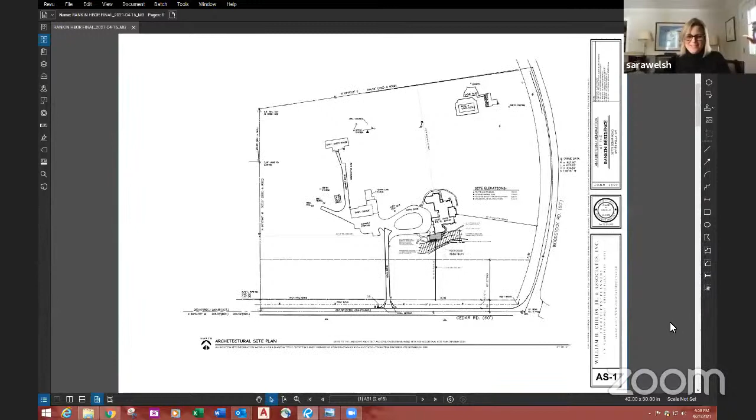There's Dave. Nice background. And we are live streaming. Okay.

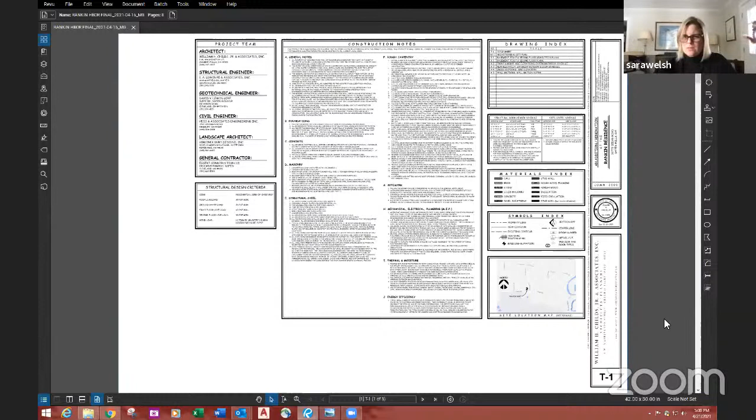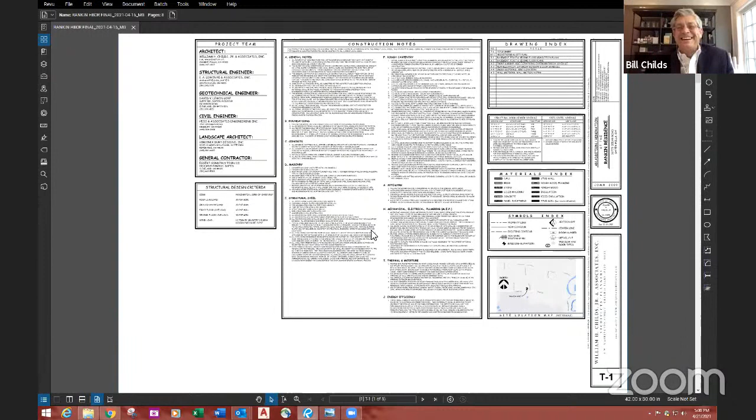Well Bill, I hope everybody can read every one of those words on that page. Yeah, might need to get double glasses here. Yeah, exactly. Oh there, there's that. That's better than looking at a bunch of writing. Yeah, there you go, exactly.

Is there a presentation mode? I'm just curious. Maybe that is it, but um...

It's a good place to start.

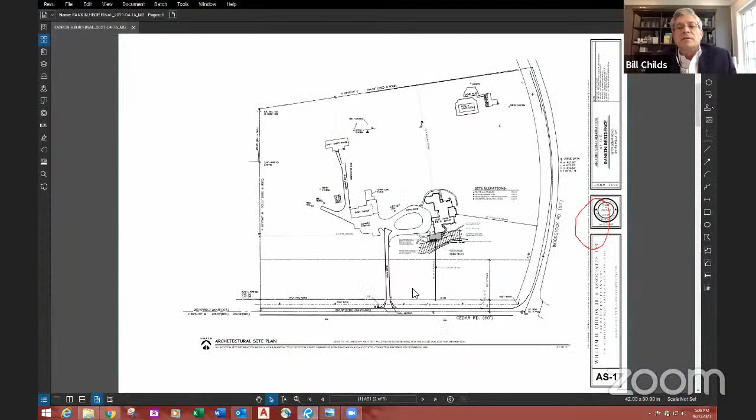Matt, do you want to go maybe to the site plan? Let me clear this. So this is the site, and let's see here.

There we go, thanks. So this elevation, or that photo that I just showed you, was the picture looking this way if you're not familiar with the property. And this is where we're proposing our addition, this shaded area.

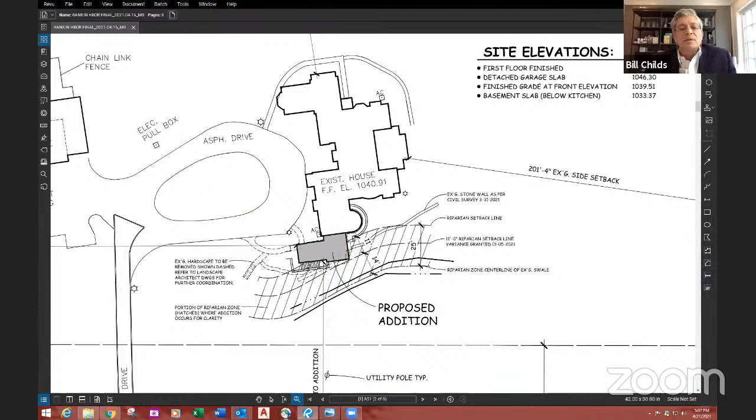So the kitchen is right here, so it comes off to like a little linen area / mudroom over in this direction, and there's a little porch here. And then we're working with the landscape architect to develop a secondary circulation path to the driveway. Do you want to go to the next one there, Matt? Maybe the floor plan.

So this is our floor plan. The previous page you just saw is the demolition plan. I won't go through every little detail, but basically, this is what was existing here, which was a small porch and a staircase that goes down into a basement area.

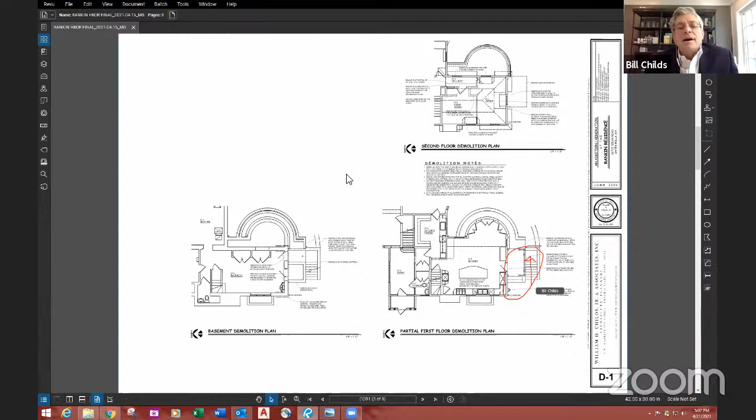And up in this area here, we're doing a little bit of renovation work for Beth's office, but our addition is more or less going to extend out this way, which you'll see on the next page.

So this is basically the foundation plan down here, which again, we're going to have a staircase that goes along the side like it currently was and goes into a basement area that is going to be unfinished.

The first floor right here is the kitchen, and this is going to now go into this transition space, which will have some linen cabinets, a half bathroom right here, some closet space. There'll still be an access out the back with a door here.

And then we'll transition into this volume, which would be pretty much a mudroom. It'll have a sink, some base cabinets, upper, some seats with storage, and then come out to a porch that detailing wise and the essence of it was very much like the original one, which is on the side of the house. And then again, we're going to have a circulation path that gets us back up to the driveway.

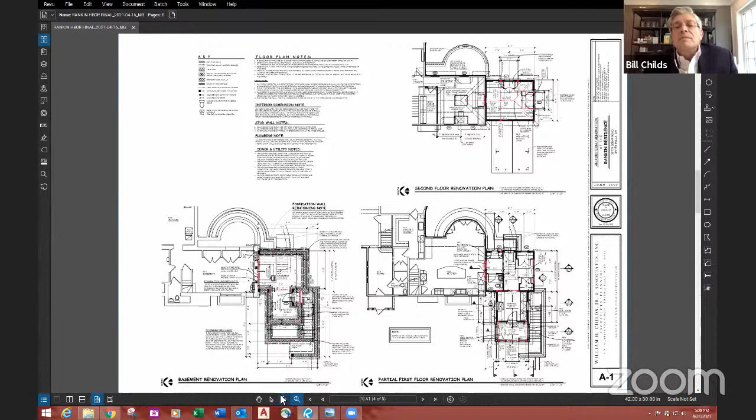Do you want to go to the next one there, Matt? Would you zoom in? Oh, sorry, not to interrupt you. Say it again, Matt. I can zoom in if you want. Okay, yeah, maybe a little bit just to get a little clearer picture of it. That's good, yep.

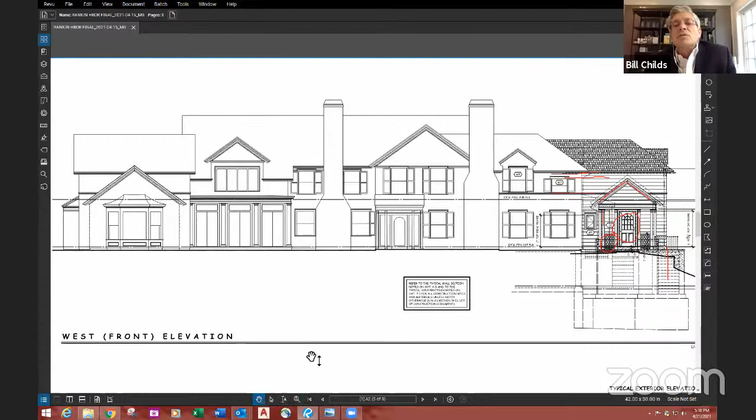Over here is the side where the stair goes to the basement. And then this door is to emulate some of the doors that are on the existing house, so they all match and are concurrent. Do you want to go down to the lower elevation there, Matt?

So this elevation is the one facing Cedar, which is south. And as you can tell, the grades down here, this kind of falls off into a slight hillside. And this is the pathway to the mudroom, which you can see the columns again in the pediment.

Again, this is the mudroom area. This will be Clay's office up here. And then this is the area where you walk in where there's some closets and some linen. And we still have a circulation path that leads us back out to the rear yard. Do you want to put up that last one then, Matt?

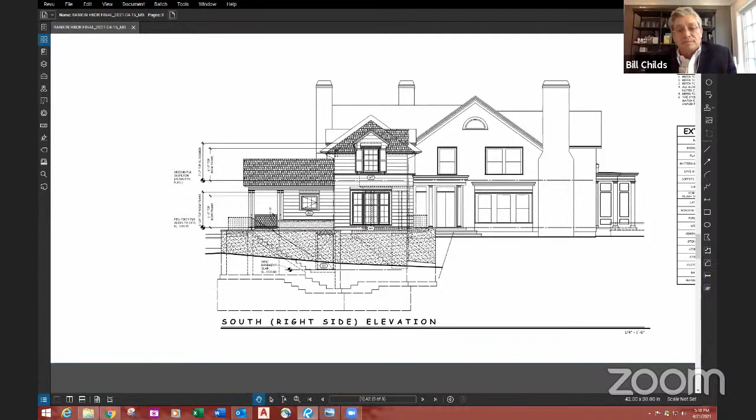So this is the rear east elevation. Again, seeing the massing come out, the dormers. We're matching all the shingles, the siding, all the detailing. This is another one of these man doors that matches all the other man doors on the house. We have a couple smaller windows to let light in. Again, you can see this is part of where the staircase is.

So overall, that's our presentation and composition of the project. Is there any questions or anything I can answer?

Did you submit wall sections? Yes. Do you want to keep going, Matt, through the drawings?

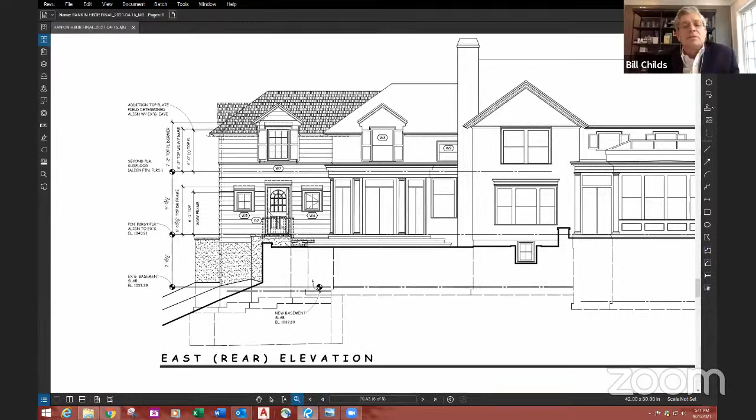These are some building sections.

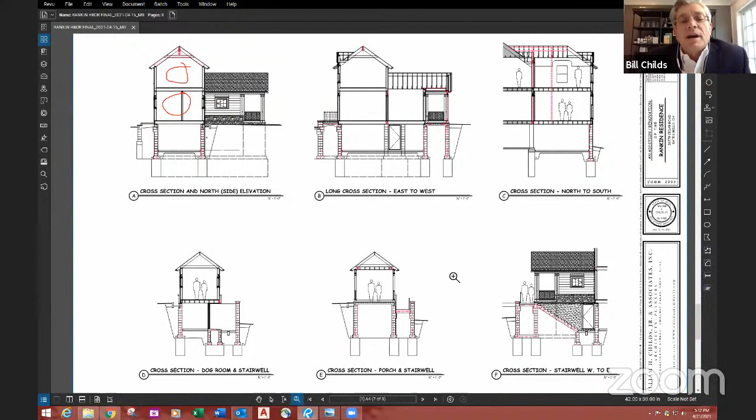So this kind of gives you an idea. This is up where the offices are. This is down where the powder room is and the linen area. This is a cross section going the opposite way, showing basically coming into the mudroom, the porch, how it's being framed. Upstairs office again. This is just another cross section looking the opposite way. And then same with some of these are looking where the mudroom area is in these various sections.

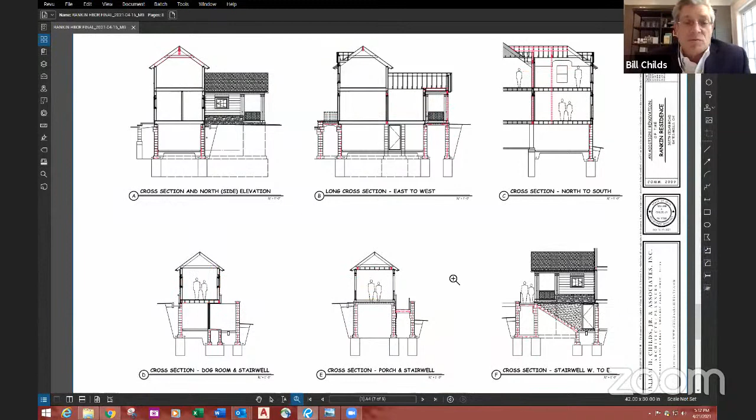So we have produced quite a few sections and details. Although it's a small project, it is fairly complex in the structure and what's happening to put it together.

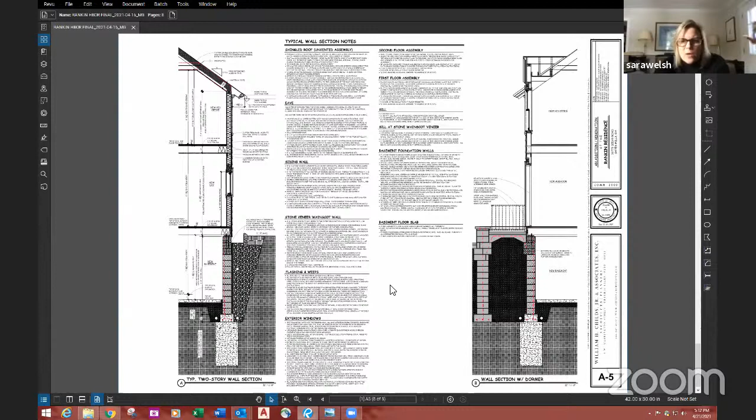Bill, were there any comments from the last meeting that you made changes on? I think we had a very positive reaction from our preliminary. We did. I think we just needed to see some final plans and wall sections. So these are our two main wall sections, listing all the different materials and specifications. It's only 330 square feet, but we have quite a bit of detailed sections and building sections to make it as clear as possible for the contractor.

I think you did a really nice job. The composition of the addition really respects the integrity of the existing historical structure. How you picked up on the dormers, the same detailing, and the eaves on the wall sections are very similar to what's on the existing house. I think you did a fine job.

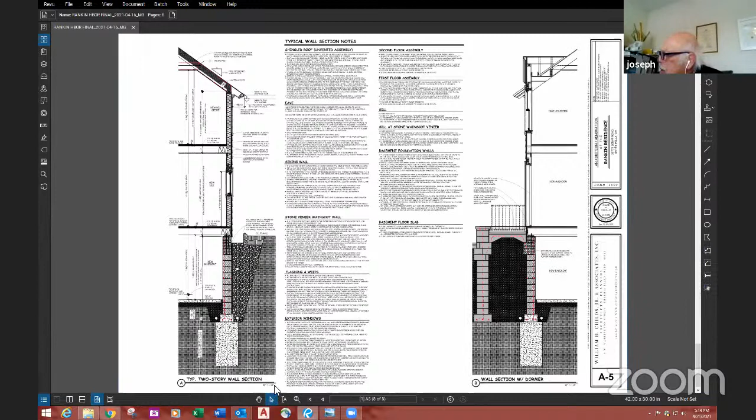I just have one question regarding the elevation that faces Cedar Road. Let me find it here. That would be the south right side. So you're showing an access stairway going down to the basement door below, correct? Correct, there's an area well with the retaining wall.

And my question is, it appears as though you're not saying what it is, but it looks like that's a concrete wall. Is that right, Bill? It's stucco to match some of the other areas of the house. For example, this elevation over here has stucco all at the bottom where the dining room is. So we're just picking up on that same stucco to match what they did originally on other parts of the home.

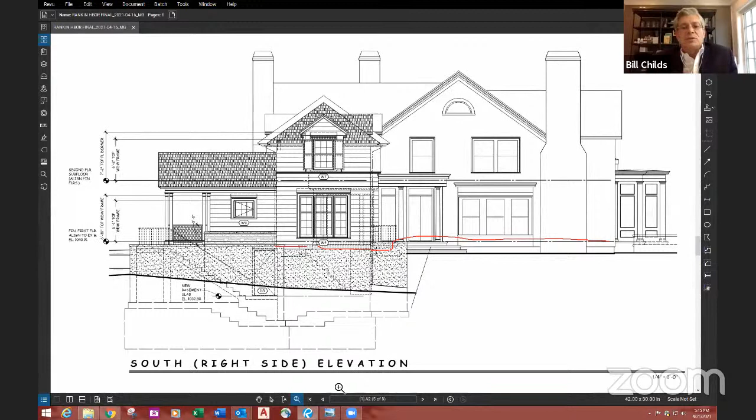I was going to suggest, that's a pretty prominent elevation facing Cedar Road. I thought maybe a brick veneer on that wall might better tie it into the existing structure, taking off the brick on the chimneys, so it all relates together. But I didn't know you were tying it into the stucco on the existing house. There's really no brick on the house, I meant stone. We felt this was an elevation we could wrap around and tie in so we didn't jump from stone to stucco, so it was a little more consistent with the composition. That's the only reason we were thinking that.

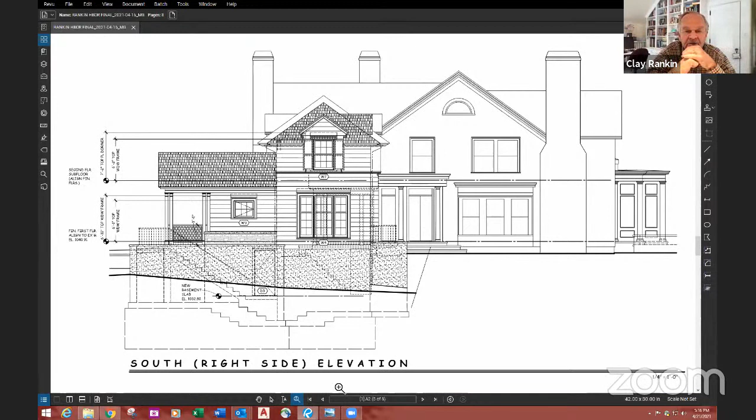And plus, it's worth mentioning that from a landscape architectural perspective, most of that wall will not be visible, even if you're standing right on the other side. There's a little ravine there, so from Cedar Road itself it's screened. We've been planting evergreens over the years so you don't see into the field between the ravine and Cedar, and we'll continue to plant evergreens there to keep that screen.

Yeah, that was my only comment. I think the whole thing looks great. The addition looks like it was part of the original house. It's really great. That's the goal. Thank you.